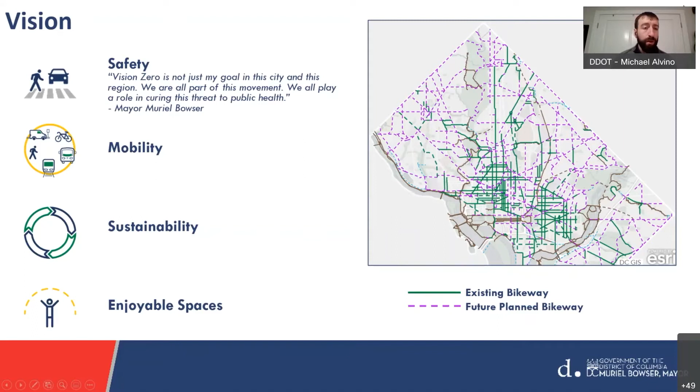For context, this project, the Metropolitan Branch Trail that you're going to be hearing about, is an element of the Capital Trail Network. This is a planned network of over 850 miles of trails throughout the region that will connect to the Capital Crescent Trail and the Anacostia River Trail eventually.

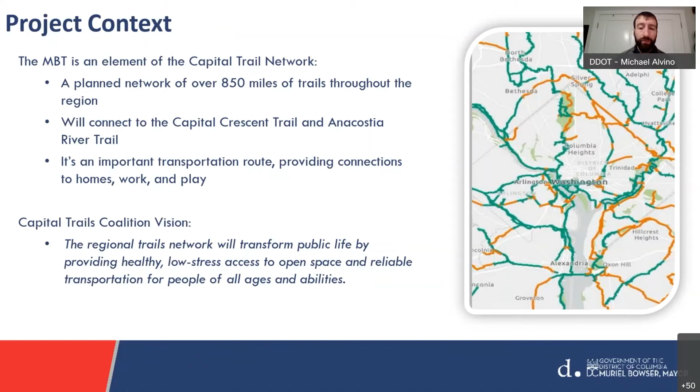And it's an important transportation route that connects neighborhoods, connects resources, education centers, parks, green spaces, and is really a regional vision that we're working on with our partners in the other jurisdictions, Montgomery, Prince George's, Arlington County, as well as the National Park Service. And it's really a vision that will connect these areas and open spaces for people of all ages and abilities.

I do want to provide a little bit of background on other phases of the Metropolitan Branch Trail. The one you're going to hear about tonight is Blair Road to Piney Branch. But in case you weren't able to attend our meeting last week, which was on the Fort Totten to Takoma section, I'll just give a little bit of a brief overview on where the other phases of the Metropolitan Branch Trail are in development. The Metropolitan Branch Trail has been in development for many years here in the district, and it's been built and implemented in phases.

And we currently have, in addition to the phase we're going to talk about tonight, four other phases that I wanted to just provide an update on.

The first one is Brookland to Fort Totten. This is down near the Fort Totten Metro Station. If you've been by there on the train recently, you might have seen all the construction activity. That project is currently in construction and it is planned to be completed by the end of this month. So we're very excited about that and do plan on it opening to the public next month, in January of 2022. So we're very excited about that.

There is a separate project website for that project, metbranchtrail-forttotten.com. You can go there for all the construction updates and see pictures of the progress that they've made.

Fort Totten to Takoma, we're currently nearing 100% design. We held a public meeting on this last week to provide the 100% design update. Those materials are available on our website, metbranchtrail.com. And that project is planned to go to construction next summer or fall of 2022.

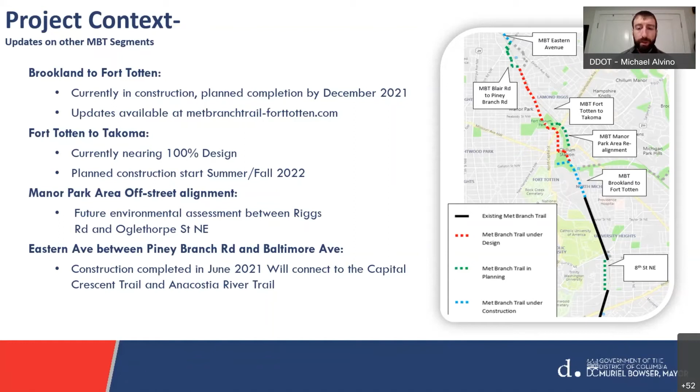As I mentioned before, the Met Branch Trail has been developed over time, over about the past 20 years, since the vision really started at the grassroots level with the Friends of the Metropolitan Branch Trail, with the idea to turn the former Metropolitan branch of the B&O Railroad into a rail trail.

Early planning started for it in the late 1990s. And in the early 2000s, the District Department of Transportation developed a concept plan that established the route alignment. In phases, construction was started in 2004 with the New York Avenue Metro. And then between New York Avenue and Franklin Street, environmental assessment was completed in 2012. And now we're looking at the next and final phase from Blair Road to Piney Branch Road.

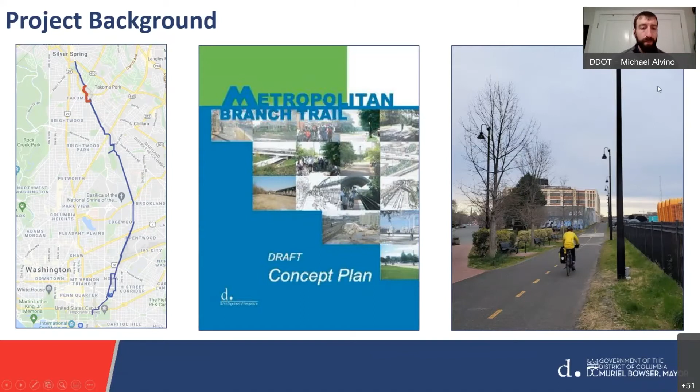I'm going to turn it over to our project manager, Charlie Alexander. Great, thanks, Michael. Can you just give me a thumbs up that my audio is working okay?

Great, thank you. So to dive into greater detail on the segment that we're looking at tonight, Michael provided some information about the recent or nearing completion of the Brookland to Fort Totten segment and the design progress on the Fort Totten to Takoma section. So this segment from the Fort Totten segment to the Eastern Avenue segment is really what fills the gap and helps complete the Met Branch Trail.

In this image on the left, you can see at the very top, the green segment is the segment that we're talking about tonight, from Blair Road to Piney Branch Road.

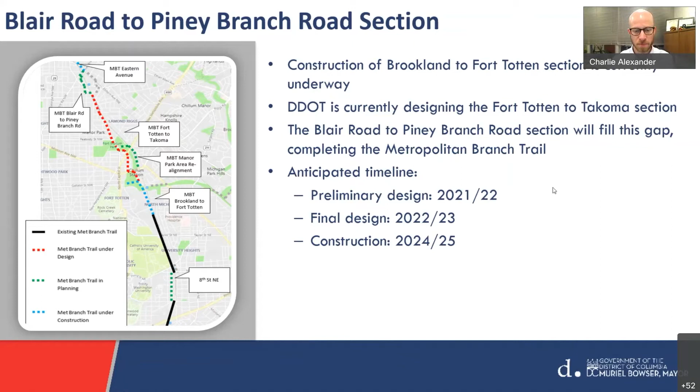Anticipated timeline: the current phase of design that we're in is called preliminary design, and I'll explain some of the things that we're looking at as a part of the preliminary design in just a moment. We're aiming to have that wrapped up sometime in 2022. And from there, go into final design, which is basically all of the construction documents necessary to get this on the ground. Construction, we're anticipating some point in 2024 or 2025, based on where we are.

Once we get to April of this year, we will have developed a preferred alternative, or recommended a preferred alternative, based on some technical information as well as feedback that we hear from the community. And once we have that recommended alternative, we will move into preliminary design, actually starting to lay that out so we know exactly what it will look like, finishing sometime mid-year 2022.

A couple other tasks that we need to be doing throughout the duration of our project and preliminary design: all the environmental investigation and review to make sure that we understand whether or not there will be environmental impacts associated with the project, and if so, what can be done to mitigate those impacts. And then lastly, there are two properties that are a part of this segment that are actually owned by WMATA, so it's a pretty long process that we've already started on, of the right-of-way tasks necessary to acquire those WMATA properties. WMATA is aware of that and has been aware of that for some time, so that'll take some time beyond the preliminary design tasks themselves.

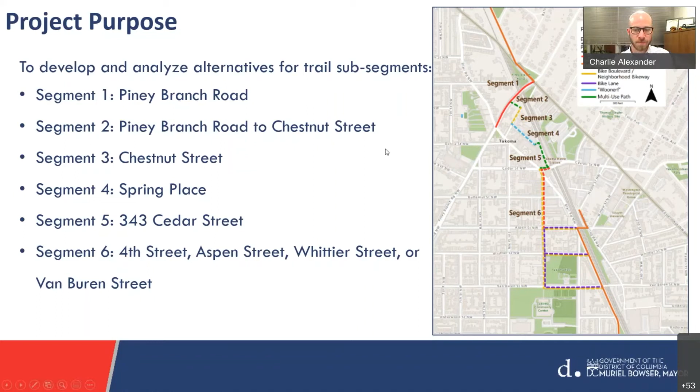So just to walk everyone through these streets and areas in pictures, segment 1 is Piney Branch Road. This is a picture taken just west of the WMATA tracks looking to the northeast, showing the pretty wide sidewalk on the south side, as well as the protected bike lanes that DDOT installed, I think earlier in 2021, which have been in place for several months now.

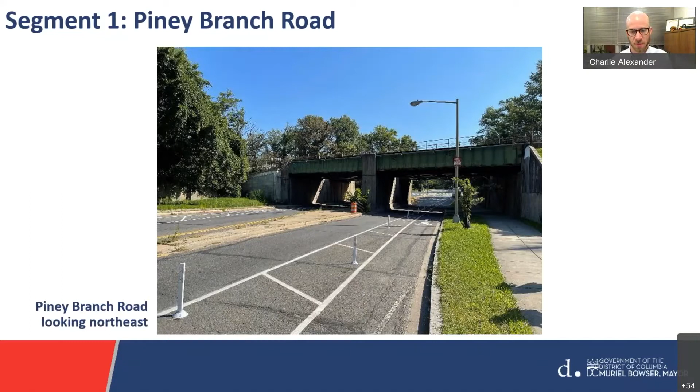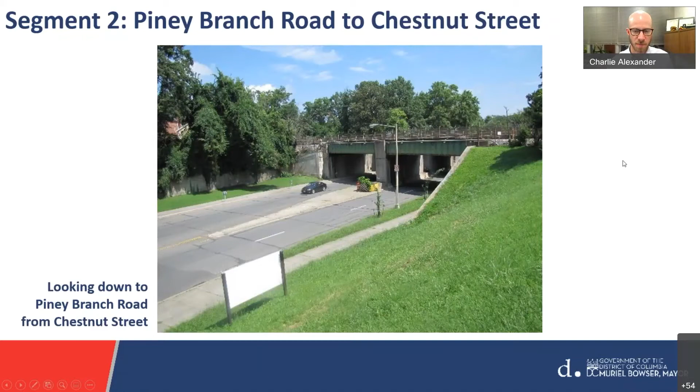Once we connect from those WMATA properties, the trail will follow Chestnut Street for a short segment. Chestnut Street had some very nice street improvements installed relatively recently, with sidewalks and curb and gutter. You can see a picture of what Chestnut Street typically looks like here, taken I believe from Spring Place looking east towards those WMATA properties.

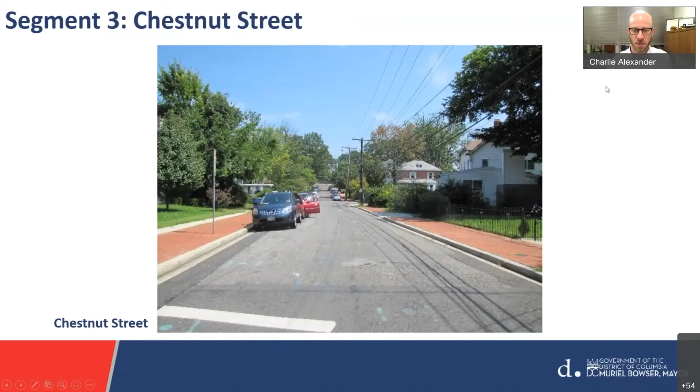From Chestnut Street, it'll turn down Spring Place. Spring Place is a local street that functions a little bit more like an alley, and has some currently designated spaces for people walking and biking. In all likelihood, those would probably be reconfigured in some capacity to make this environment a little bit more user-friendly and more seamless for people walking, biking, and driving as well.

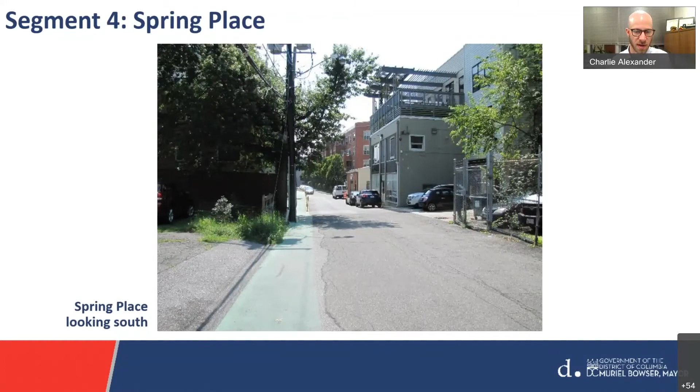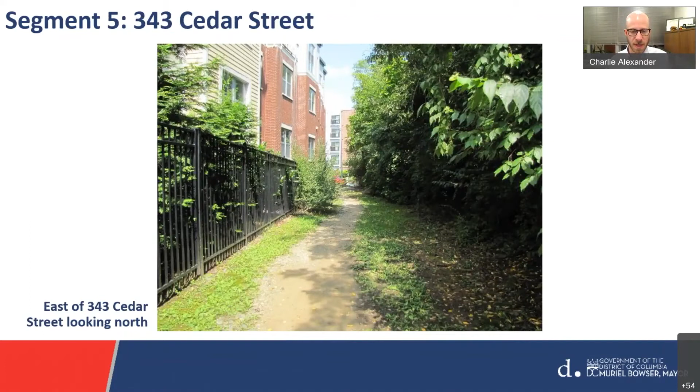From Spring Place, the trail would use this existing informal trail between 343 Cedar Street and the WMATA rail. This is a picture taken east of 343 Cedar looking north, and from here it would connect down to Cedar Street itself.

At some point south of 4th Street, we need to connect over to Blair Road. There are a few different streets where this is an option, including Aspen Street, Whittier Street, or Van Buren Street. Aspen is a little bit busier because it goes underneath the WMATA rail, while Whittier and Van Buren are more on the quiet side, frankly.

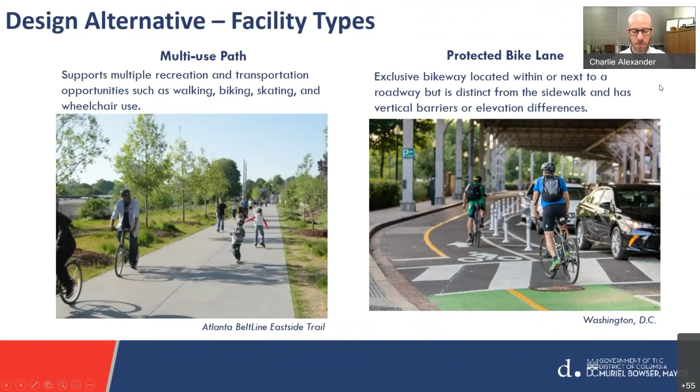Sometimes we need to manage the volume on a street, sometimes we need to manage the speeds traffic moves at. Those are tools in the toolbox. When we do those things with intention, trying to create a bike network, we're doing that with a bike boulevard or neighborhood bikeway.

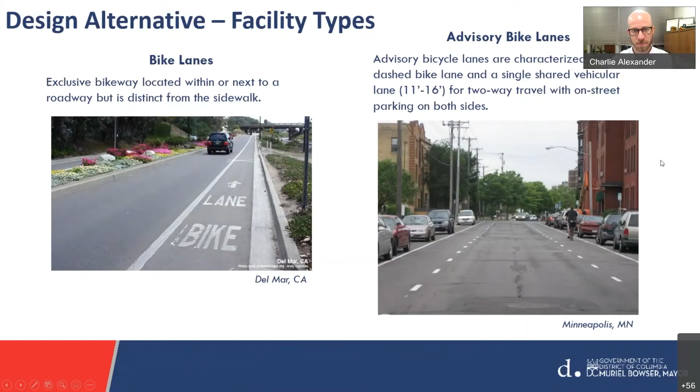As I mentioned, the purpose of our tasks currently and of our charter over the next few months is to arrive at a preferred or recommended alternative for the alignment and facility types of the Met Branch Trail between Piney Branch Road and Blair Road. The community input that we get tonight is going to be really helpful for moving towards that recommended alternative.

We're also doing a variety of technical analyses to understand measures of effectiveness of all of these different options. This is just a sampling of what we're looking at from an engineering and planning standpoint, things like how comfortable these different options are going to be for different users, how safe they're going to be, how direct the route will be, and how many times somebody using the route would have to stop.

If they're trying to make a continuous trip along the Met Branch Trail, it's sort of a proxy for safety, trying to understand what conflicts there will be with driveways in the area as well as bus stops. We also want to understand the impact to vehicles moving through the area. Will alternatives increase the amount of delay? Will they increase the amount of queuing at intersections, particularly signalized intersections in the area?

I saw a question come up that we'll take in Q&A in a minute about whether or not there will be on-street parking impacts. That's something we are quantifying as part of this effort. Some of the options in some segments do, many don't, many are somewhere in between. We can talk about that more in the breakout rooms.

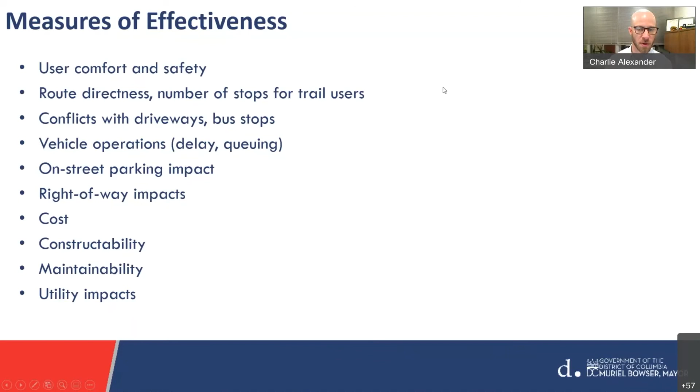So in a moment, what we're going to do is take a break for questions and answers in general about the projects, and then we're going to have everyone select a breakout room for about 30 minutes or so at the end.

The purpose of the breakout rooms is really to do a deep dive on some of these segments and understand the options we're considering, the pros and cons of those different options, get your feedback on which options you like, which you don't, why you do or don't like different options, and maybe things we should know as a design team from your local experience and boots on the ground from being in the neighborhood.

So the best way to do this—with the number of segments and options, it's pretty impossible to go through all of these with the whole group tonight—we thought the best way would be to divide it into three different breakout rooms from north to south.

I'll give instructions on this again in a moment, but breakout room 1 will be segments 1, 2, and 3—Piney Branch Road to Chestnut Street, and then Chestnut Street at the northern limits of the project.

Breakout room 2 will be Spring Place and 343 Cedar Street, so segments 4 and 5. Breakout room 3 will be all of the on-street options from 4th Street to Blair Road—4th Street, Aspen Street, Whittier Street, and Van Buren Street.

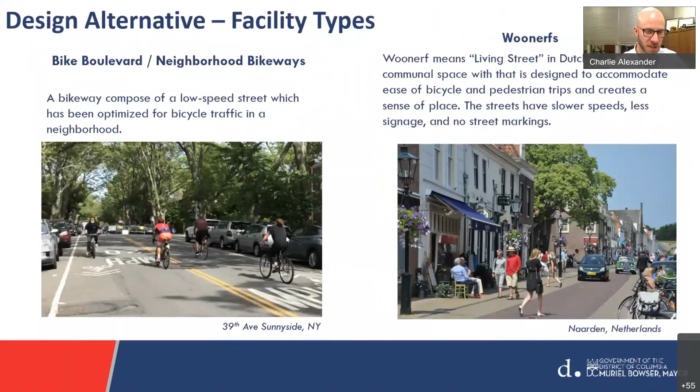So what Jason's describing, a contraflow bike lane, is what is actually currently in place on 4th Street from Cedar to Butternut. On that block, there is one-way traffic southbound and then a contraflow bike lane northbound. Jason, the direct answer to your question is a contraflow bike lane is sort of a nuance of a protected bike lane or a nuance of a bike lane. So it's certainly something we've considered. If you choose to join the third breakout room for segment 6, which looks at 4th Street, we're looking at some options that would add two-way protected bike lanes in this area, which are most suitable for addressing some of the contraflow questions you raise. There's also elements of a contraflow bike lane on segment 1 on Piney Branch Road. So not necessarily something we didn't consider, just sort of a nuance of design that I didn't include in the presentation for the sake of brevity.

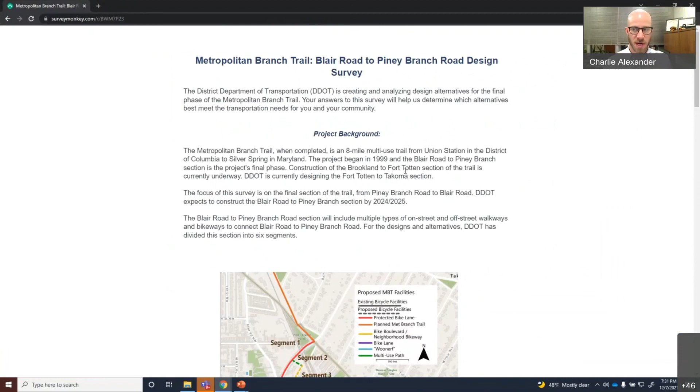Great, thank you. If you want to provide feedback on all the segments, the survey Anjali dropped in the chat gives the same background we're talking about tonight, and gives you the opportunity to pick a particular segment of the trail. I'm going to pick Segment 1, Piney Branch Road, and go to next. It'll go through all the options, the pros and cons we're walking through tonight, and then ask for your indication of support for the alternative and any other feedback you've got.

Once you finish a segment, it'll give you the option to provide feedback on other segments if you want. So that's how you could look at another segment. We tried to make it user-friendly so people can provide as much feedback as they want on any of the segments.